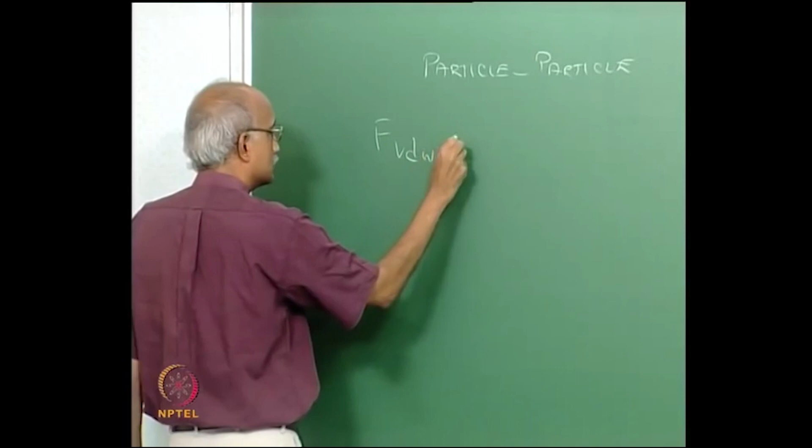The van der Waals forces in the case of a particle to particle interaction can be written again in terms of Hamaker constant A132. If you recall, our definition of 1, 2 and 3 is: 1 will be in this case particle 1, 2 will be particle 2, and 3 is the intervening medium, liquid or gas. So, Hamaker constant multiplied by...

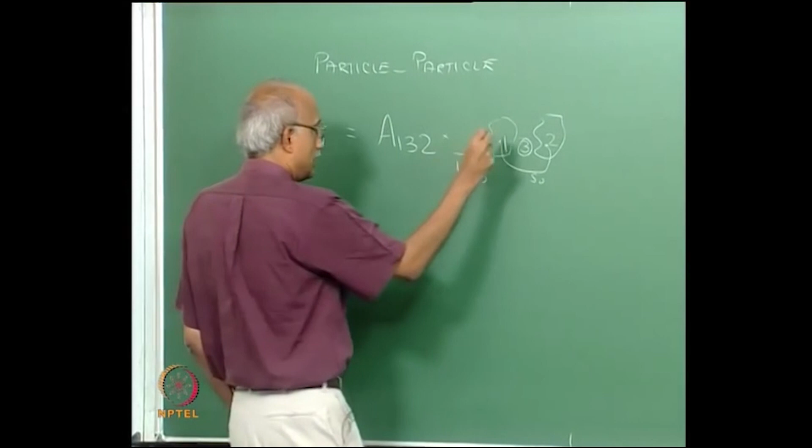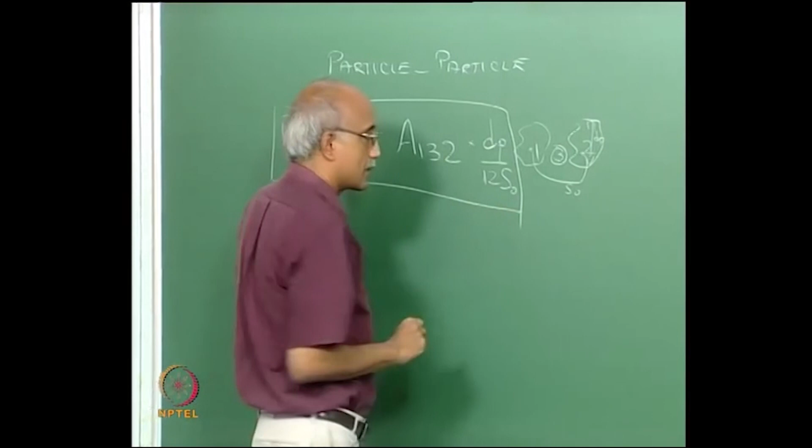The distance of separation between them also enters your equation as 12 times, if the distance is some S0, it is divided by 12 times S0, and the diameter of the particles, essentially representing them as equal sized particles, will again enter in the numerator as a size term. So, just like the van der Waals force of interaction between a particle and a surface, the force of interaction between two adjacent particles also shows a linear dependence on the particle size.

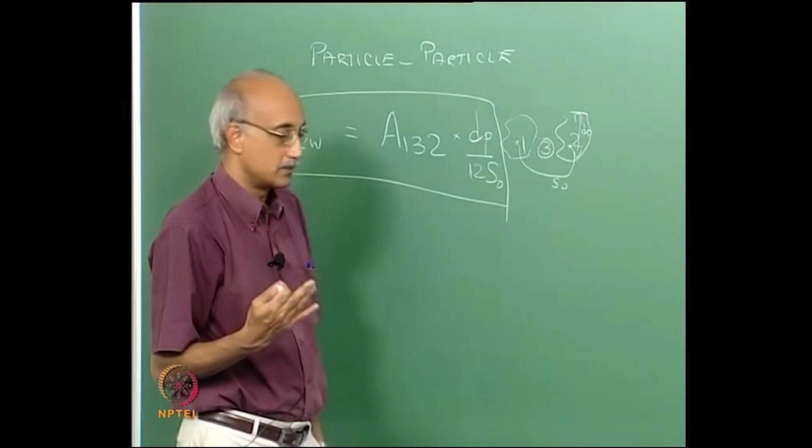Now, this is for the case where the two particles are of equal size, particle size dp. When you have two different diameters dp1 and dp2, then you essentially define an equivalent diameter, a mean diameter. So, if you have two particles of sizes dp1 and dp2, you can define an effective diameter 1 over dp bar, which is equal to 1 over dp1 plus 1 over dp2...

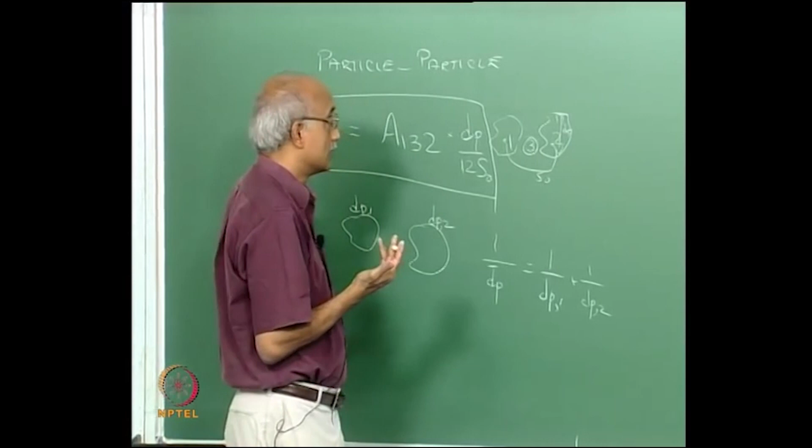...and that will serve as the effective diameter that governs the van der Waals force of interaction between these two particles. So, if you look at the van der Waals force of molecular interaction, the mechanisms and the forces are really not very different from the forces of interaction between a particle and a surface.

Similarly, if you look at electrostatic forces, and let us say that you have two particles of charges q1 and q2, then the electrostatic force of interaction between them will be q1 q2 divided by 4 pi epsilon r epsilon 0 times s squared, where q1 and q2 are the charges on the two particles, epsilon r is the dielectric constant of the medium, epsilon 0 is the permittivity of free space, and s is the distance of separation between the centers of the two particles. So, again electrostatic forces between two particles are very, very similar in their behavior to electrostatic forces between a particle and a surface.

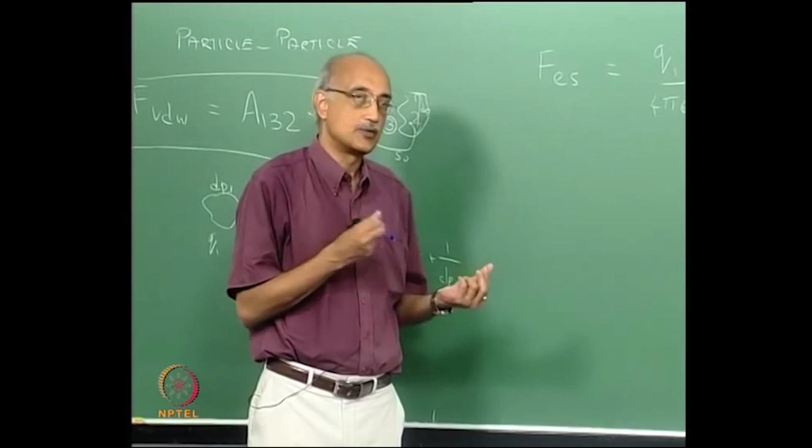So, what is unique about particle to particle interactions? Why do we need to study that differently from particle to surface interactions? The primary reason for this is this cohesive behavior. What do we mean by cohesive behavior? When you have a suspension where you have a fluid and you have various particles that are suspended in the fluid...

...there are various modes of interaction between the adjacent particles. In the simplest case, they do not even know that each other is there. So, the behavior of every particle can be taken to be independent of the behavior of any other particle in the system.

But in reality, there is always a tendency for two particles that are near each other to try and find each other. And when that happens, you first start forming a bridge between two adjacent particles. It is called a liquid bridge. And when that happens, when you have bridging between two particles, this is called the pendular state of cohesion.

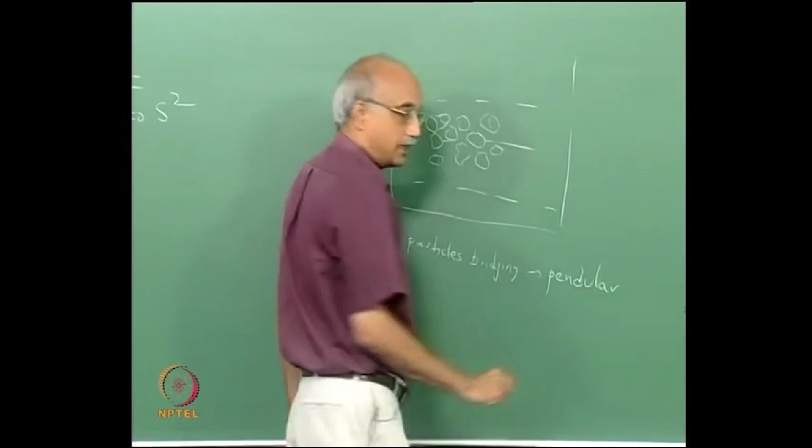What will happen next? A third particle will be brought into this system. When you have three particles that are bridged by the surrounding fluid, that is called the funicular state of cohesion.

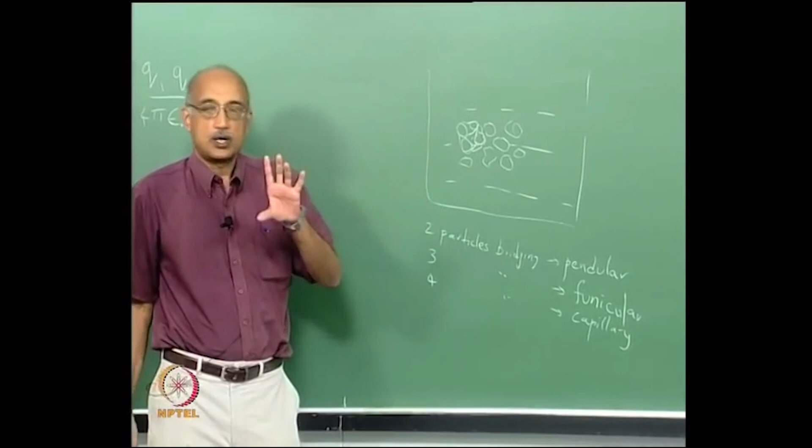And finally, the next state would be one that involves, let us say, 4 particles. When that happens, that is what we call the capillary state of cohesion. Now, when this bridging extends beyond 4 particles and starts encompassing a larger number, more than 4 particles now begin to be bridged by the surrounding fluid, that is called the droplet state of cohesion.

And it turns out that the cohesive behavior between the particles very much depends on what state of cohesion they are in. For example, when you have no cohesion, that is the simplest case, so each particle can be treated as a hard sphere that is moving on its own in the surrounding fluid. When you have two particles that are bridging, pairwise bridging, the pendular state, that is a state of minimum cohesion in the fluid. So there is cohesive behavior, but it is reasonably mild.

As you go into the funicular and capillary phases, the extent of cohesion begins to increase, and therefore, you have to start treating the particle phase virtually as a continuous phase that is present within another continuous phase. In other words, you have to start following the two-phase model in order to characterize the behavior of such suspensions.

And by the time you get to the droplet state, where there is larger than 4 particles that are essentially bonded together, it becomes highly cohesive behavior, and you cannot describe the motion of such a suspension without understanding how this droplet behaves as a separate phase that is contained within the macroscopic fluid phase.

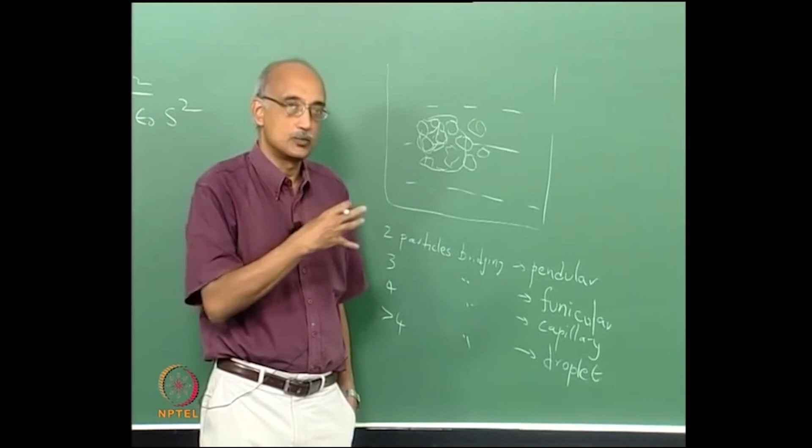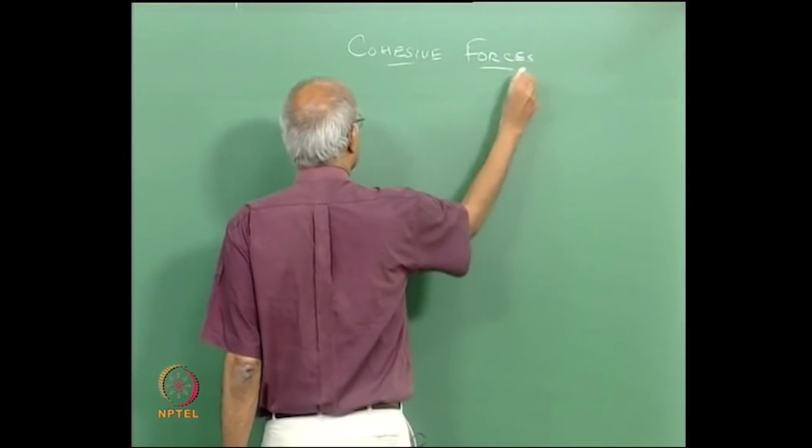So that's what makes cohesion interesting. These are behaviors that you don't normally encounter in the case of particle to surface interactions. Now, in terms of forces of interaction, cohesive forces - we already talked about van der Waals forces and electrostatic forces. In addition, you have what are known as capillary forces.

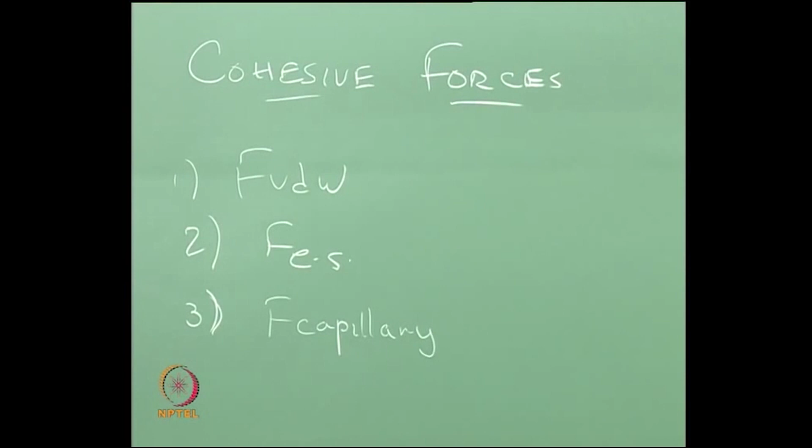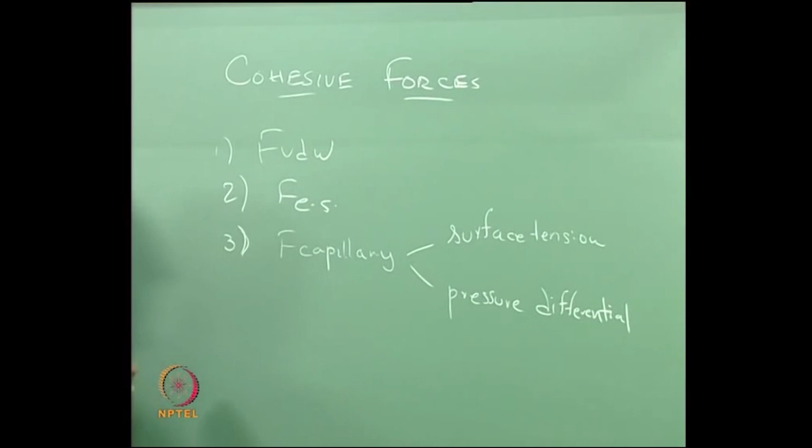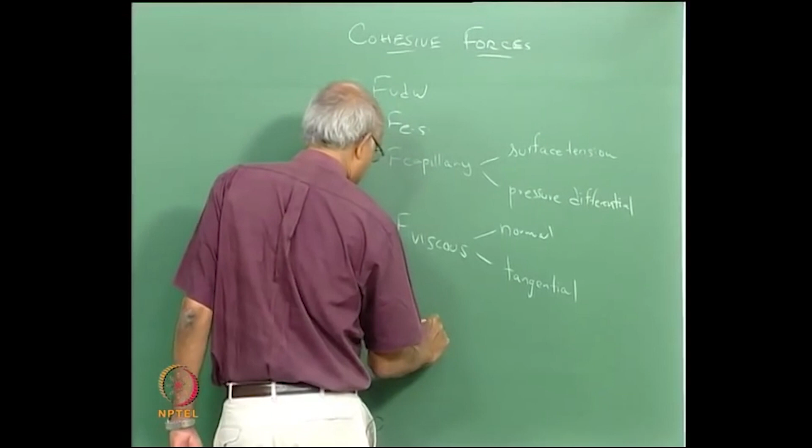Now, the capillary force itself has two components to it. One is surface tension related, and the other is pressure differential related. In addition to that, you have viscous forces, and here again you can subclassify them as normal and tangential. And finally, you have spring like forces, and this also you can classify as normal and tangential.

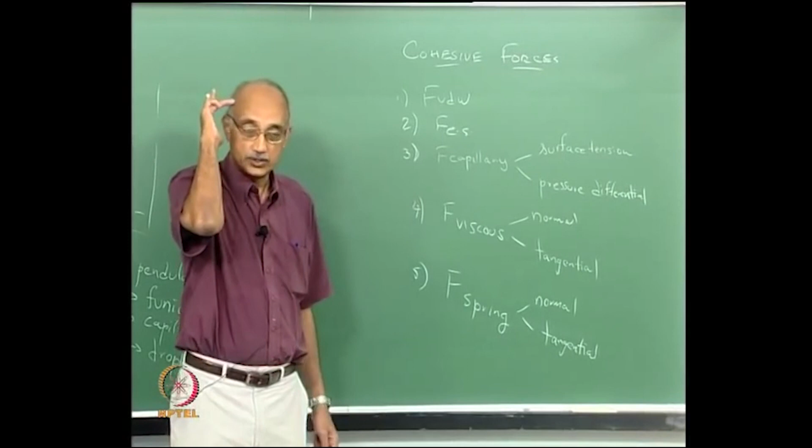So we will look at what these are in more detail, but the point is that in order to describe cohesive bonding between two particles that are in solution, you have to characterize all of these forces, and the net force that is acting will be a sum of all these forces that are acting on particles that are suspended in a solution. So let us look at forces 3, 4 and 5 in a little more detail.

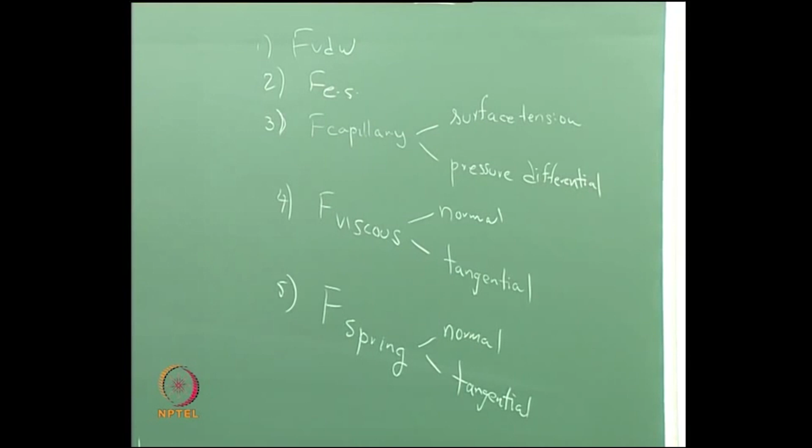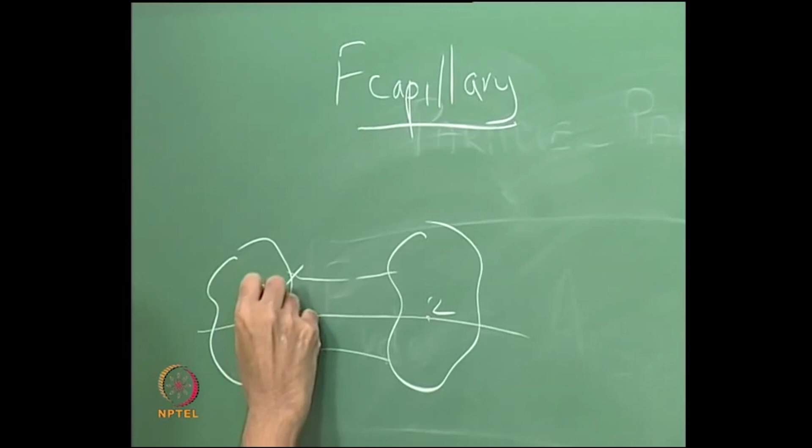So, what do we mean by capillary forces? Let us take the situation where you have particle 1 and particle 2, and there is a liquid or fluid bridge between them. Now, the angle to the centroid of the particles that the meniscus makes, this angle is called beta. Are we still on? Okay.

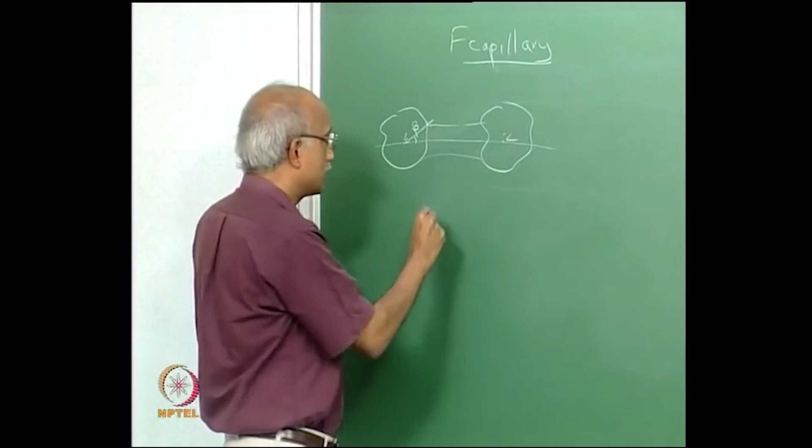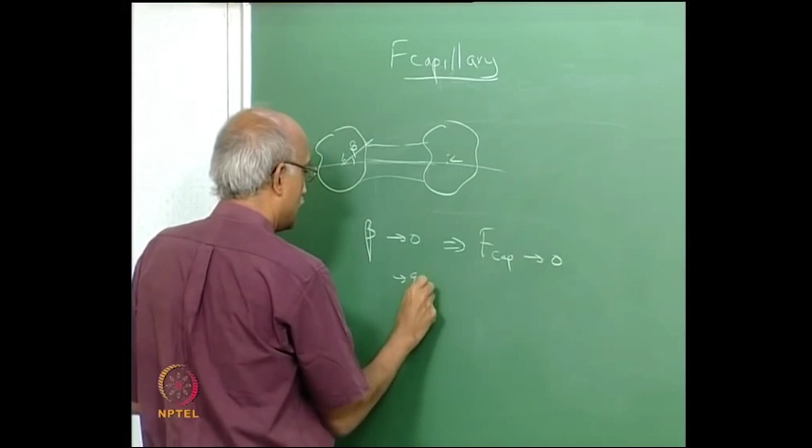And as the angle beta becomes smaller and smaller, as beta tends to 0, the force - essentially this meniscus will become thinner and thinner. So, as you can imagine, there will be less and less cohesive bonding between the particles. So, as beta tends to 0, F capillary will tend to 0, and as beta tends to 90 degrees, F capillary will tend to its maximum value.

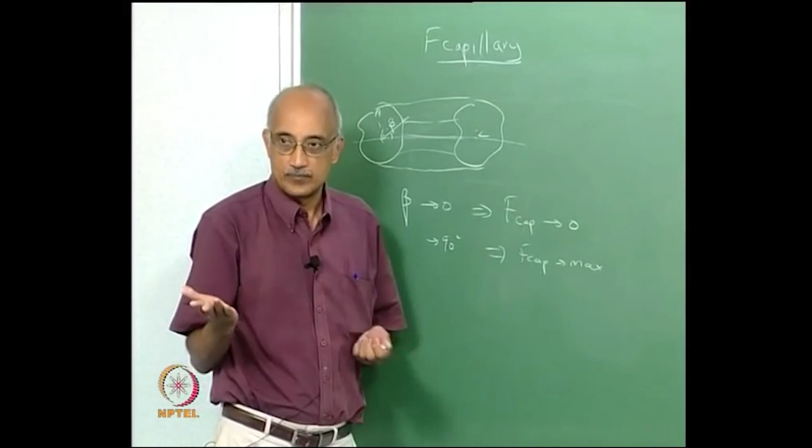So the 90 degree corresponds to the case where essentially the liquid bridging extends all the way to the outer perimeter of the particles. So beta is now 90 degrees. So this represents the case where we have complete wetting - this is a case where you are into the so called capillary or droplet regime of cohesion. So whether you are in the pendular or funicular or capillary or droplet state depends a lot on this parameter beta, which is also called the half filling angle or the angle of cohesion between adjacent particles.

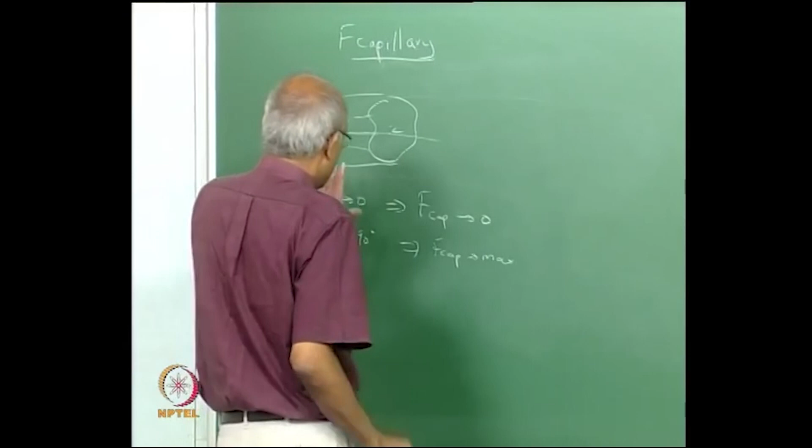So when we look at the forces now between these two particles, there are really two components to it. One is just due to the surface tension that is associated with the fluid that is bridging the particles, and the other is associated with the pressure differential delta P across the fluid to air interface that surrounds this suspension.

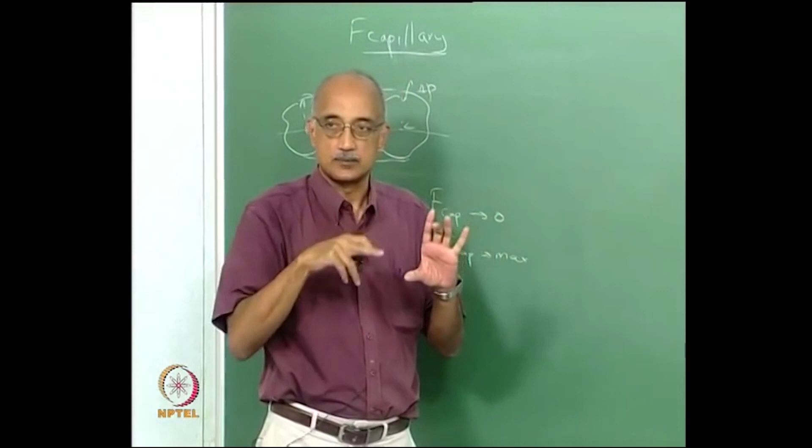So you have to split the capillary force into its two components, F surface tension plus F pressure differential, and you write those as 2 pi rp gamma times sine squared beta plus pi rp squared delta p sine squared beta, where 2 pi rp gamma sine squared beta represents the surface tension force and pi rp squared delta p represents the circumferential force, which is the pressure differential multiplied by the circumferential area of the particle. Or you can simplify this and write it as 2 pi rp gamma sine squared beta times 1 plus rp delta p over 2 gamma.

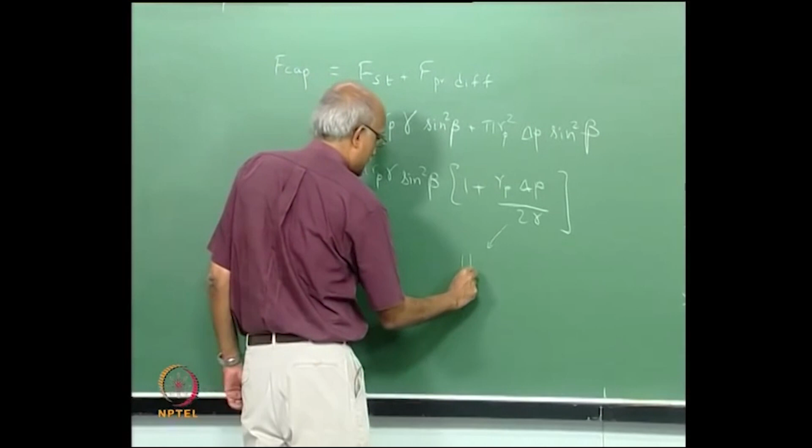This parameter, rp delta p over 2 gamma, is represented as h star, and it stands for what is known as the dimensionless mean curvature, which is a parameter that can be extracted from the basic Laplacian equation governing the elastic behavior of these particles in suspension. The expression for the capillary force can be written as 2 pi rp gamma sine squared beta times 1 plus h star, and it can be evaluated for essentially any pairwise combination of particles suspended in a fluid.

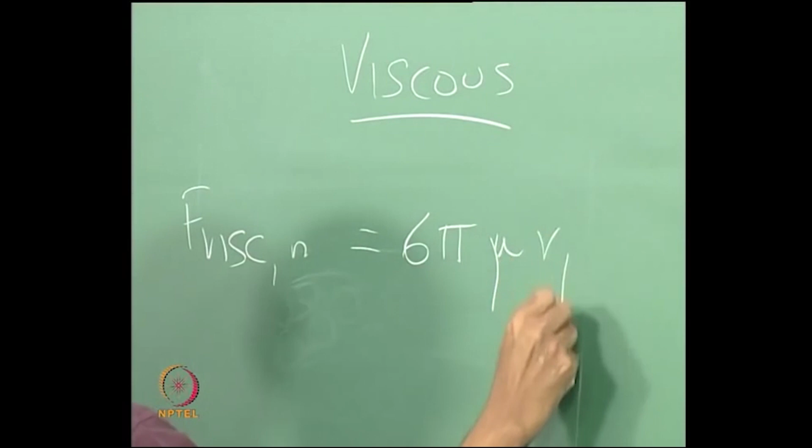Now the viscous forces again can be split into a normal force and a tangential force. The F viscous normal, the normal contribution, is given by 6 pi mu rp times v normal times rp over s, where rp is the radius of the particle, s is the distance of separation between particles, and Vn is the relative normal velocity between two particles in suspension. If you have two particles, that velocity can be deconvoluted into a tangential velocity and a normal velocity, and the delta between the normal velocities of the two particles enters this equation as Vn, while the delta between the tangential velocities enters the equation for the tangential viscous force, given by 6 pi mu rp times Vt times 1 plus 0.5 logarithm of rp over s.

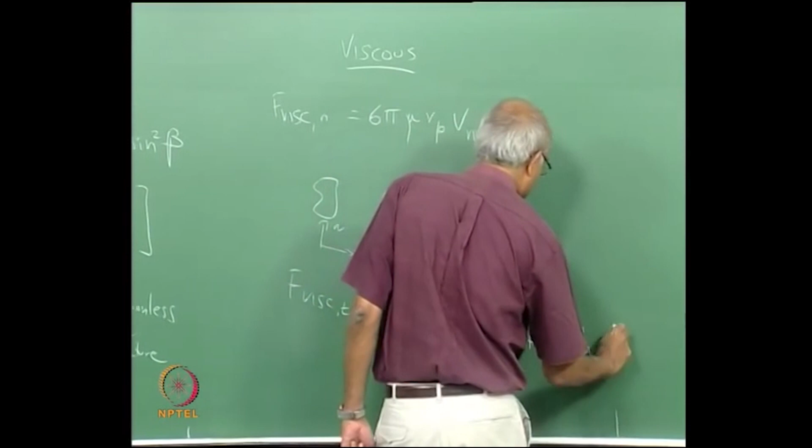So in all of these equations, one thing you'll notice is that most of the adhesive forces still have a linear dependence on diameter, just like we described earlier with particle to surface adhesion forces, where the adhesion force essentially scaled as the size of the particle. Looking at the cohesive forces, the surface tension force clearly has an rp dependence, but the pressure differential, because it's an area effect, has an rp squared dependence. So the net of these two terms gives a dependence of capillary force on particle size somewhere between 1 and 2, depending on whether surface tension or pressure differential forces dominate.

In the case where the h star term is very small compared to 1, you get a linear dependence of the capillary force on rp. Where h star is much larger than 1, you get an rp squared dependence, and for any intermediate value of h star, you get a dependence somewhere between 1 and 2.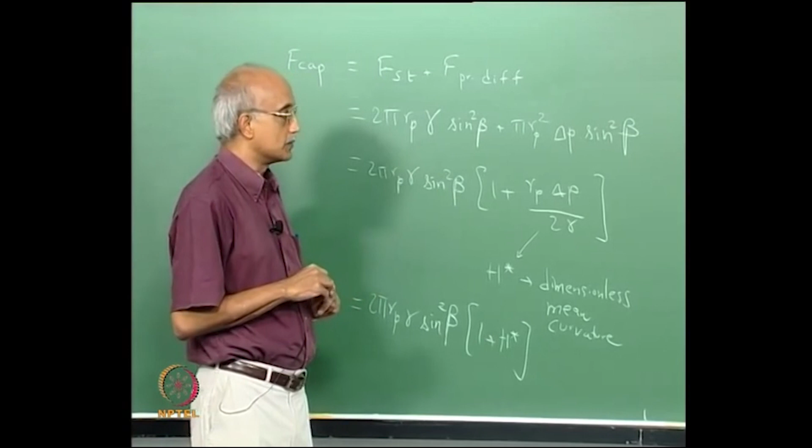Looking at the viscous forces, there is clearly an rp squared dependence of the viscous force between two particles. What that means is, as particles get smaller, the viscous forces will drop off much faster compared to the capillary forces—that is, the normal viscous force.

However, the tangential viscous force, which relates to how particles move relative to each other in the direction of flow—when we say normal and tangential, if your flow direction is like this, the normal force applies normal to the flow direction, and the tangential force applies tangential to the flow direction.

So the normal viscous force goes as the square of particle size, whereas the tangential viscous force essentially goes as rp times logarithm of rp. If you look at the total viscous force and its particle size dependence, you'll reach a value somewhere between 1 and 2, again depending on whether the tangential term or the normal term is dominant.

Just as we reported empirical data on surface to particle adhesion suggesting a linear dependence on particle size as well as relative humidity, there is quite a bit of work done looking at agglomeration of particles in suspension from a purely empirical, experimental viewpoint. You take a bunch of particles, put them in suspension, and monitor their number over time. As the total number decreases over time, there is obviously more cohesion and agglomeration going on. So the rate of reduction in total number of particles over time is a measure of the extent of cohesion present in the system. Another way to track it, of course, would be to look at size.

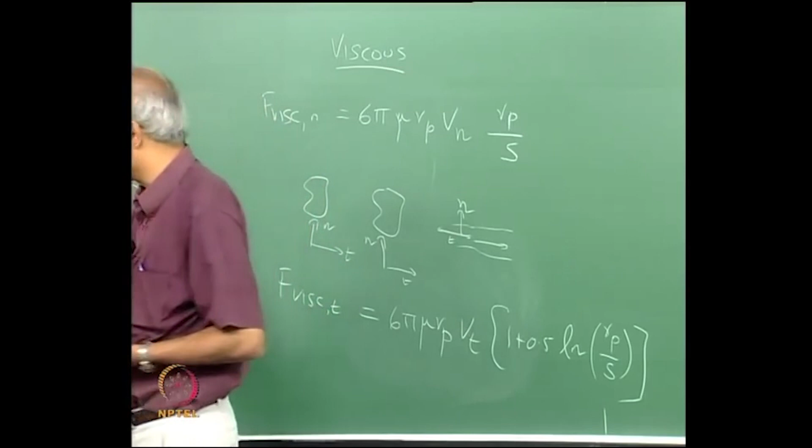If you track the mean size, that size will keep increasing as a function of time if there is cohesion. There are two ways to detect the presence or absence of cohesion in a suspension, and both depend on plotting quantities as a function of time. In one case you can plot n of t, the number of particles of any size at time t. If there is no agglomeration happening, what dependence would you expect? It will be constant as a function of time.

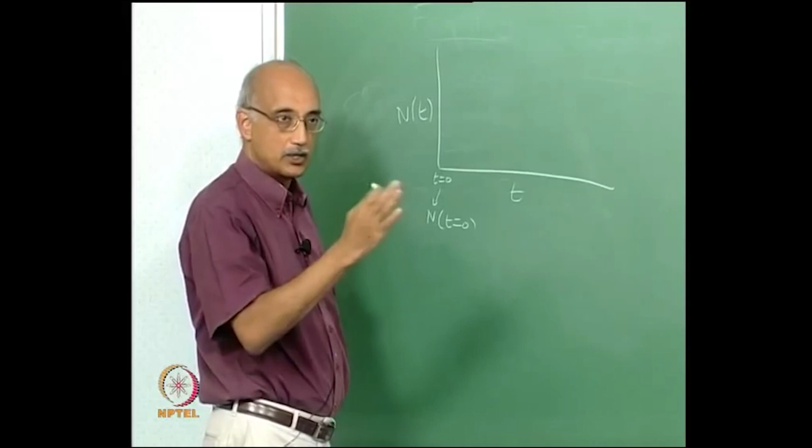So if this is your n at t equal to 0, in the absence of cohesion, this number will remain constant over time. However, as cohesion starts to happen and particles start to agglomerate, you will see a net reduction in the number of particles as a function of time.

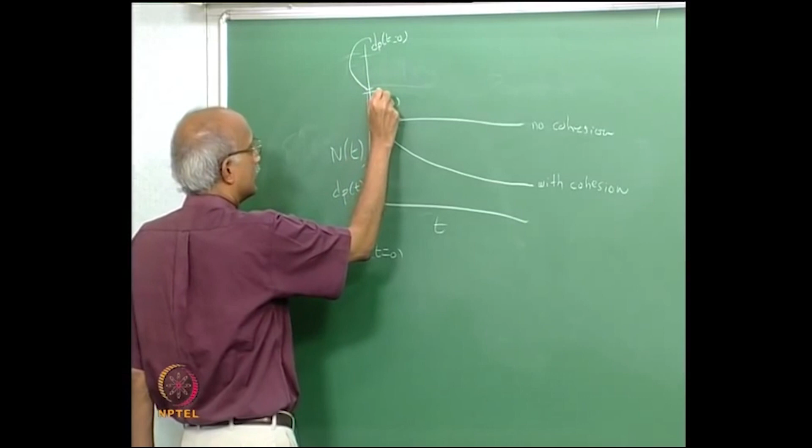Similarly, you can also plot particle size dp as a function of time. Let us say this is your particle diameter at time equal to 0. If there is no cohesion, it will remain constant over time, whereas if there is cohesion, that particle size will keep increasing in some fashion. So with cohesion you will see an increase in the mean particle size of the system.

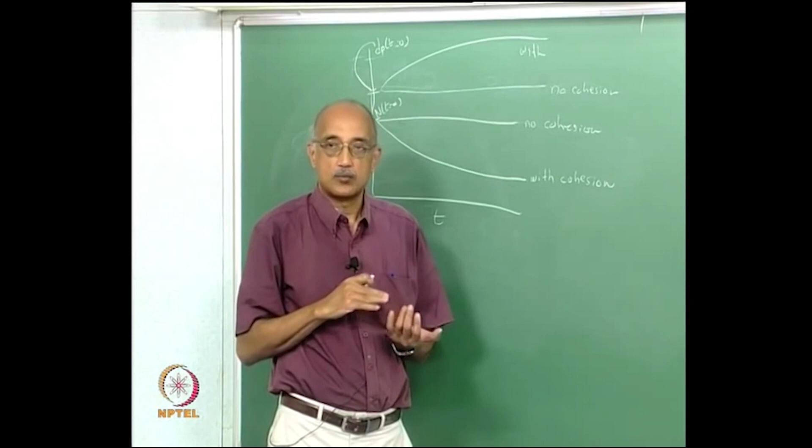So this behavior, where there is a monotonic increase of particle size with time, or a monotonic decrease in the number of particles with time, is clearly indicative of cohesive phenomena happening in your suspension.

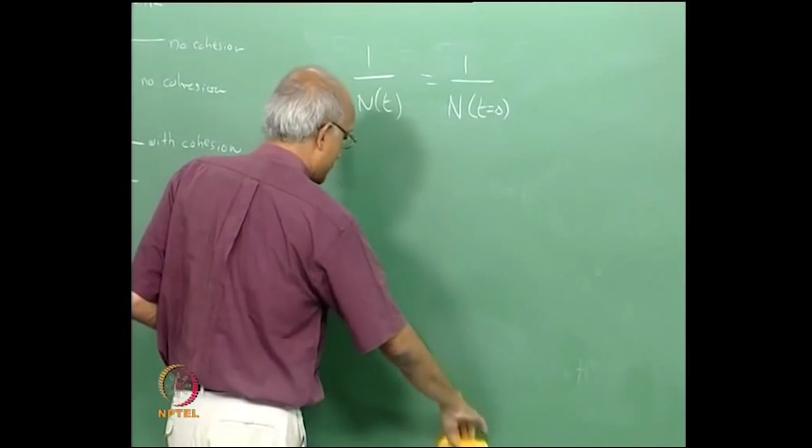In fact, there is an empirical equation that governs the relationship between particle counts at various times. If you take 1 over n of t, this is equal to 1 over n at t equal to 0, plus 4kT Cc t over 3 times mu, where n of t is the number of particles at time t, n at t equal to 0 is the number of particles at time equal to 0, k is the Boltzmann's constant, T is the temperature, lowercase t is time, mu is viscosity, and Cc is the Stokes-Cunningham slip correction factor.

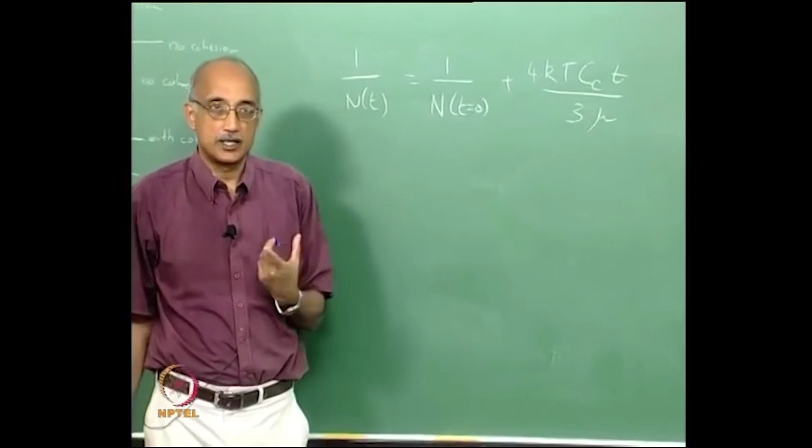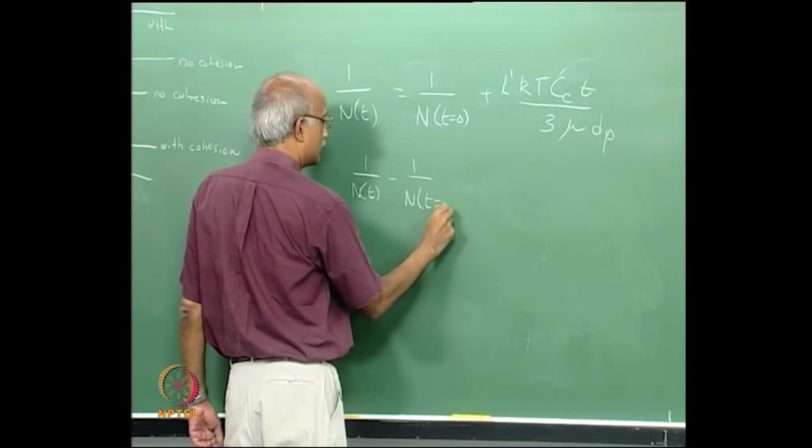If you recall, I mentioned that this is roughly proportional to 1 over dp. So effectively you can rewrite this with some constant k prime and have the particle diameter in the denominator. So what is the implication of this equation? What does this tell us about agglomeration kinetics? What parameters does it depend on? If you take 1 over n of t minus 1 over n at t equal to 0, this is now equal to k prime kT t over 3 dp times mu.

So if you examine this equation, which, by the way, is empirical - that means people have done thousands of experiments, recorded the data, and done a regression analysis to determine how particle counts change as a function of time, and come up with this expression for various systems.

What this tells us is that as temperature increases, there is increasing agglomeration. As time increases, there is increasing agglomeration. As particle size decreases, there is increasing agglomeration, which is why nanoparticle systems in particular are very susceptible to cohesive behavior - there is an excessive tendency for nanoparticles to agglomerate in solution and form clusters. And finally, as viscosity decreases, there is an increasing tendency to agglomerate.

So if you want to keep particles suspended and dispersed in solution, this gives you a lot of clues about how to keep particles separated in suspension. Use high viscosity liquids. Is water a high viscosity liquid? Compared to some, but it's not the highest viscosity liquid you can find. You can add additives to increase its viscosity. Particle size, probably you cannot play with too much - you need nanoparticles, right?

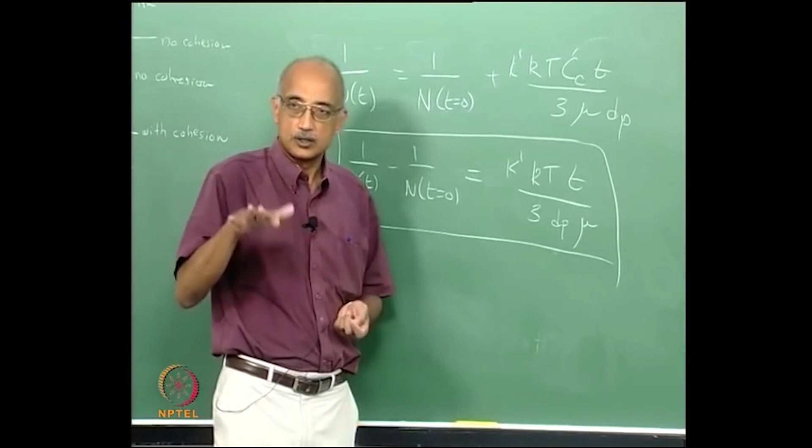However, temperature - now that's interesting. Essentially, by lowering the temperature, you can keep the particles more uniformly dispersed. So if you are trying to maintain a nanoparticle suspension and keep the particles dispersed, what do you do? You freeze it - that's the simplest thing to think of, because when you freeze it, the particles are held where they are. Then just before you are ready to use the nanoparticles, remelt the suspension. Alternatively, even if you don't freeze it, lower the temperature close to the freezing point, which will reduce the mobility of the particles and prevent agglomeration from taking place.

Time - obviously the longer you let the suspension sit, the greater the tendency for cohesive behavior to happen.

If you want to use a nanoparticle suspension, you use it as soon as you make it, or alternatively you make the suspension just when you are ready to use it. It's like a just-in-time process. If you let any nanoparticle suspension sit for any length of time, you are going to see severe cohesive behavior.

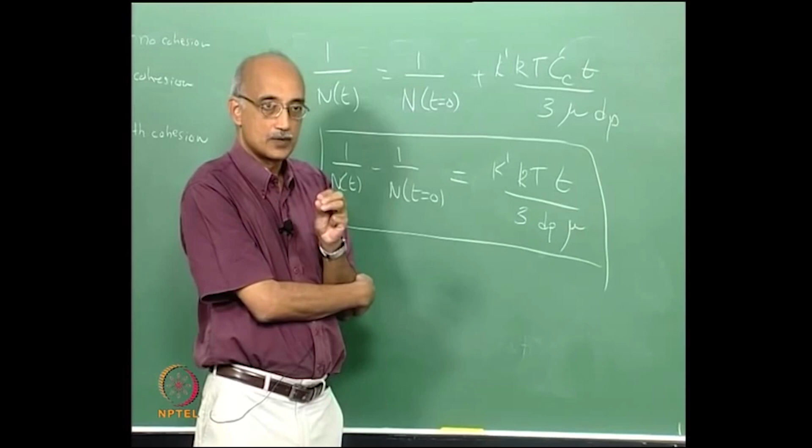You will see particles disappear and particle sizes increase because of cohesion, agglomeration, and so on. When you look at extent of agglomeration, particle size sits in the denominator. Now what that tells us is that the force of agglomeration between particles is actually scaling inversely with particle size. So this would tell you that F cohesion in general goes as 1 over dP. But if you look at the equations we have formulated, we are not really getting that trend anywhere. They are all either linearly dependent to particle size or linearly dependent on some power or exponent of particle size.

So how do you reconcile that with this behavior that we know intuitively, that finer particles will find each other and adhere much faster compared to larger particles? Just like the apparent conflict we discussed earlier in terms of particle adhesion and particle removal, this is something else to ponder. Is there a theoretical reason for this? Can we explain this, or is it completely anomalous behavior? We'll come back to this later.

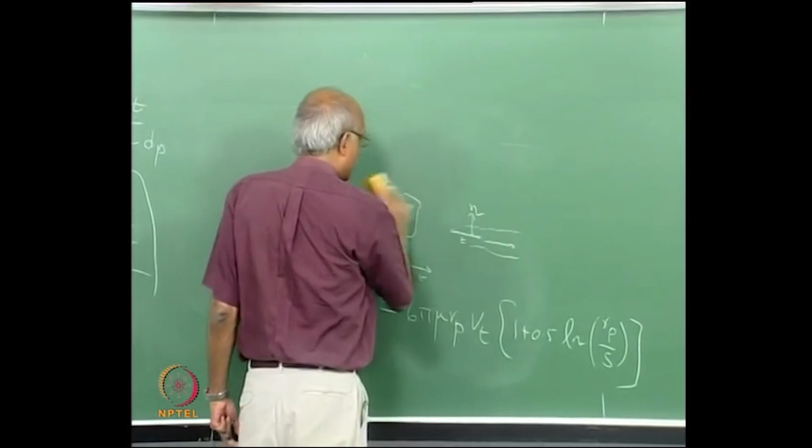We have talked about van der Waals forces, electrostatic forces, capillary forces, and viscous forces. What do we mean by the spring forces?

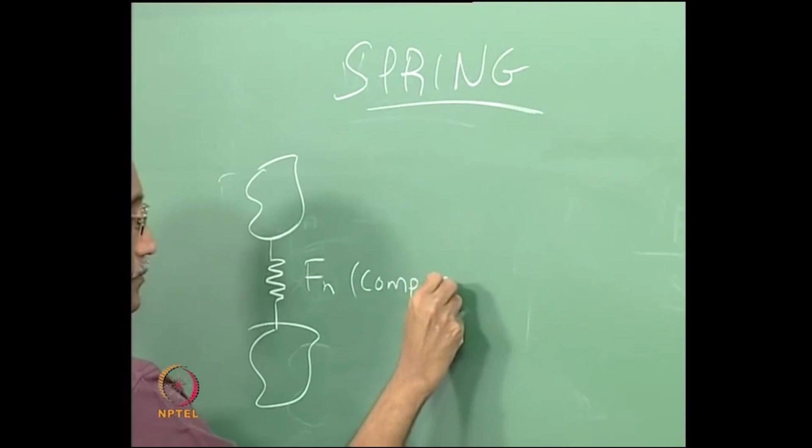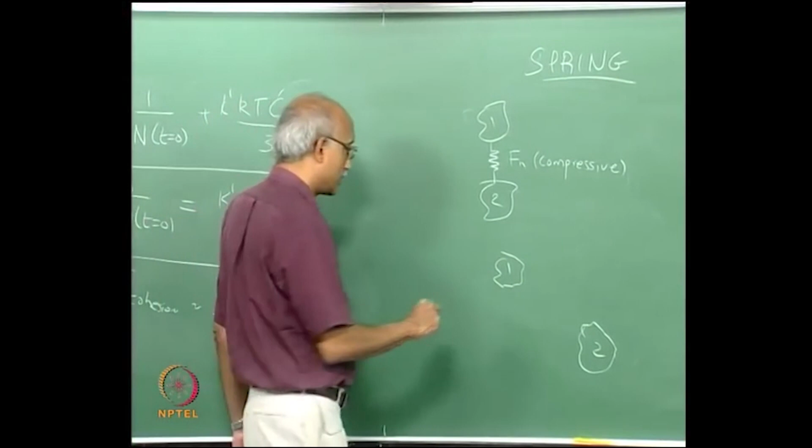When you have two particles that are in suspension, they behave as if they are attached to a spring. In the normal direction there is a compressive force associated with this pair of particles. Over time, as particles start moving away—let's say particle 1 stays where it is, but particle 2 has now moved—then there is also a tangential spring force that applies, Ft, which has a tendency to bring them back together. Both the Fn force and the Ft force are essentially attractive forces.

The particles are constantly trying to, as you try to move them apart, stick together, and so they both lead to cohesive behavior. The higher the normal force and higher the tangential force, the greater will be the extent of cohesion.

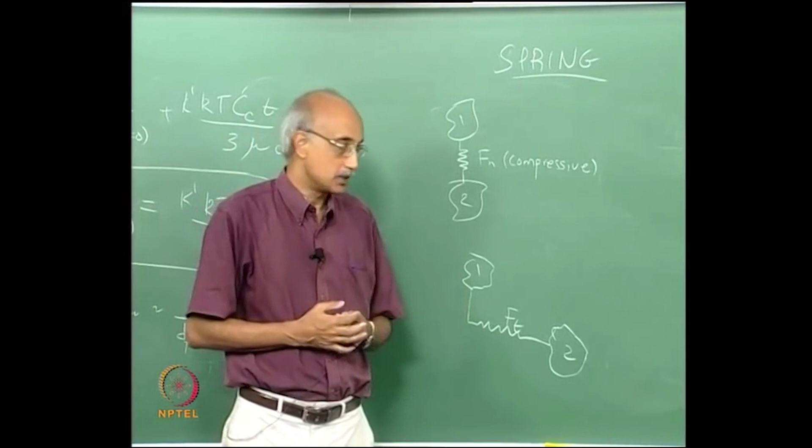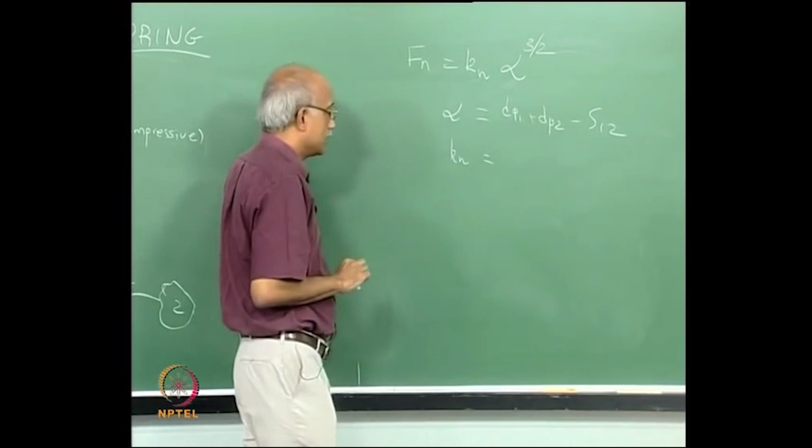This compressive force Fn can be written as Kn times alpha to the power 3 by 2, where alpha is dP1 plus dP2 minus S12, where dP1 and dP2 are the diameters of the particles and S12 is the distance of separation between the centers of the particles. The parameter Kn is given by 4 by 3 times dP star times square root of E star, where E is the Young's modulus.

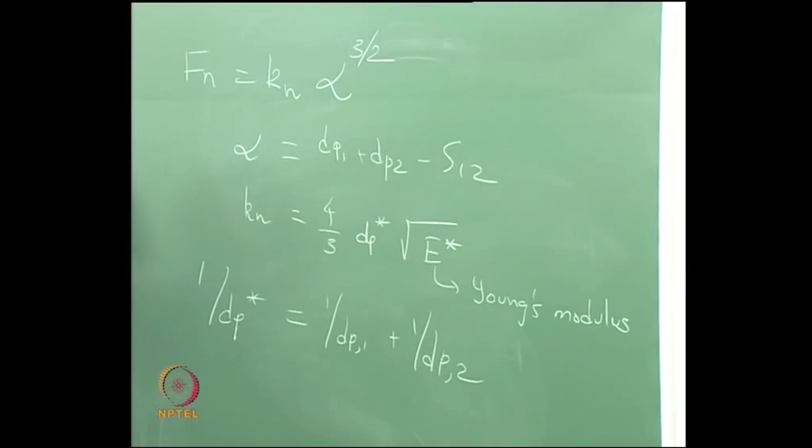dP star is calculated by taking 1 over dP star equals 1 over dP1 plus 1 over dP2, and E star is calculated as 1 over E star equals 1 minus nu1 squared over E1 plus 1 minus nu2 squared over E2, where the nu values are Poisson's ratios.

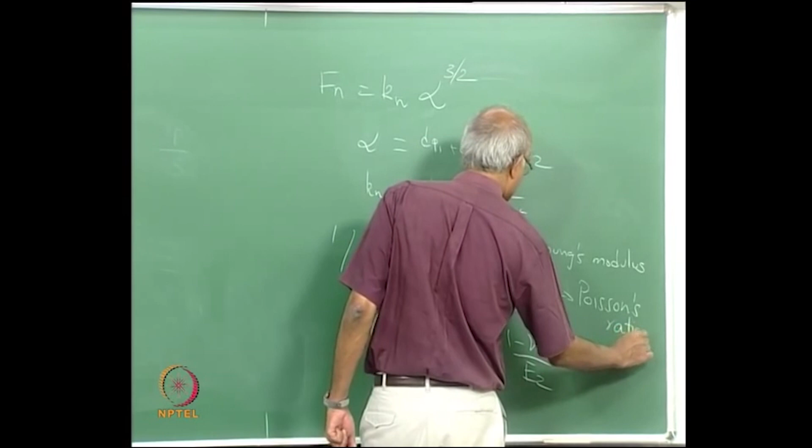So if you look at the expression for the normal force, the key dependencies are on the sizes of the particles, the distance of separation between the particles, and on the associated parameters that govern the elastic behavior of the system, particularly the Poisson's ratio and the Young's modulus for the two particles.

If you look at the tangential component, Ft is related to Ft0, which is the time-zero value of the tangential force, basically where the two particles are virtually below each other. So there is no tangential displacement, and as soon as the displacement starts to happen, this kicks in. It is actually minus kT times delta S, where delta S is the tangential distance of separation between the two particles.

Delta S is related to time delta t by the equation delta t times Vt. So if you take a time differential delta t and multiply it by the tangential velocity—again the relative tangential velocity—that gives you the distance of separation at time equals t. So this is a relative value.

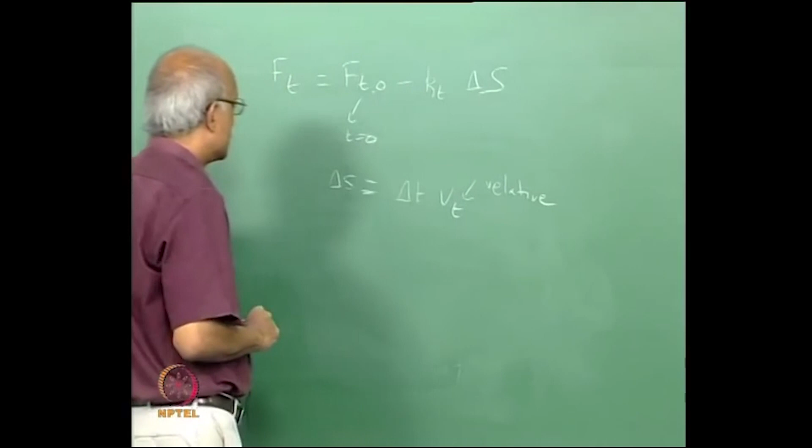Basically, when you have two particles that are adjacent to each other, they also have a tendency to have a compressive interaction between them as well as a shearing interaction. So this tangential interaction can also be written as a shearing force, but in this case, when particles are suspended in solution, the shearing force tries to bring them back together, just as the normal force is a compressive force that tries to force the particles together.

So, going back to that list we had, what you can see is virtually all of the cohesive forces are attractive in nature. Van der Waals forces are attractive, surface tension forces, pressure forces, viscous forces, as well as the spring forces are all attractive in nature. The only force that is potentially repulsive is electrostatic forces. So this again gives you a lot of clues about how to keep particles separated when they are suspended.

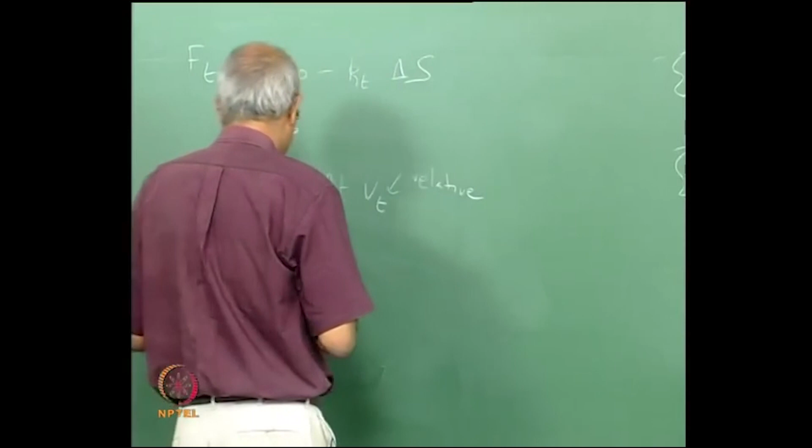Since virtually all the forces of interaction are attractive in nature, the first thing you have to understand is there is an overwhelming tendency for particles to attract each other. So, if you want them to repel each other, one way is to charge them. If you impart a slight charge on all the particles, the electrostatic force can be made repulsive in nature.

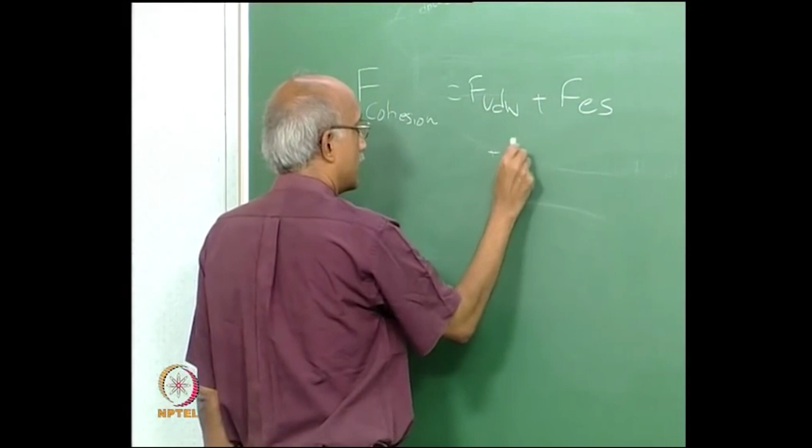So let us sum up all the forces that act in cohesion: van der Waals, plus electrostatic, plus capillary, plus viscous, plus compressive, plus shearing.

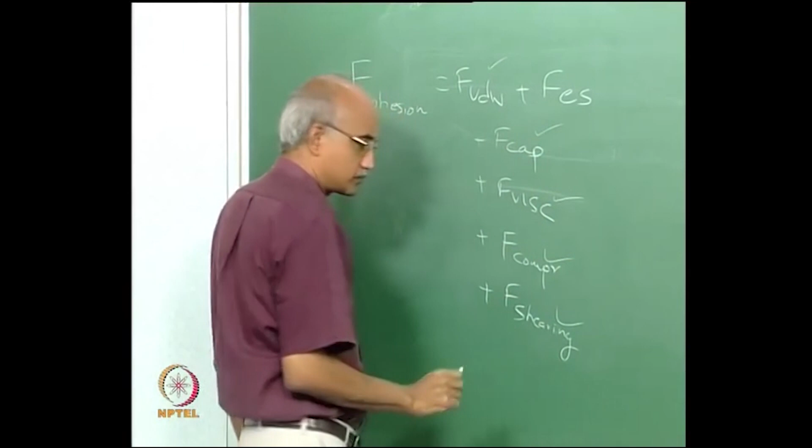Of these, van der Waals, capillary, viscous, compressive, and shearing are all attractive in nature. However, the electrostatic force can be attractive or repulsive. By inducing a large charge on adjacent particles, ensuring they are of the same sign, you can set up a repulsive force which can balance or even overwhelm all the other contributions. So if I am trying to minimize cohesive behavior, one technique is using electrostatic effects to provide a repulsive force in the system.

What else can I do? Well, we know these forces are attractive, but you can make them weaker. For example, van der Waals forces can be reduced by simply immersing particles in a liquid medium. So if you are trying to keep particles segregated, do not keep them as a dry powder. A dry powder has a much more severe tendency to agglomerate than a wet slurry. So suspend the powder in a liquid to minimize van der Waals attraction.

Later on, when you get ready to use the powder in dry form, you can always evaporate the liquid in which they are suspended. Of course, to do that you are better off using a high volatility liquid which can be easily evaporated. Water is not an easy liquid to evaporate, but there are many organic solvents you can suspend particles in which have high volatility, so you can easily recover the particles in the dry state whenever you need them.

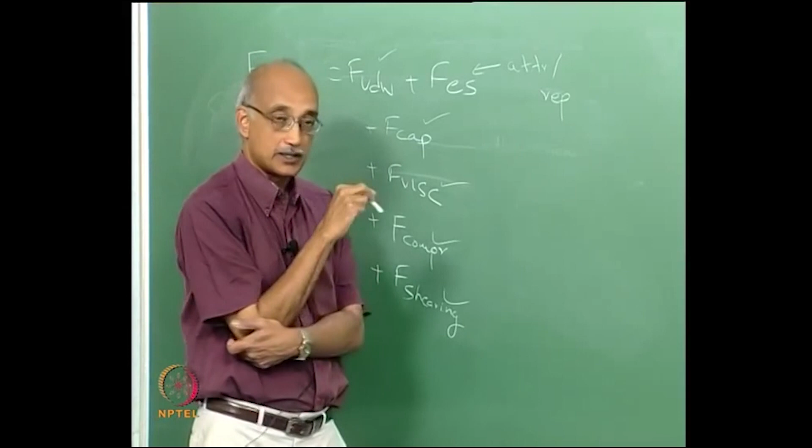In terms of capillary forces, surface tension is an important component. How do you minimize surface tension? By using surfactants, and that is why surfactants are widely used to minimize cohesion in suspensions. There are two ways surfactants help: one is by reducing surface tension forces, and the other is by reducing hydrophobic-hydrophilic interaction forces.

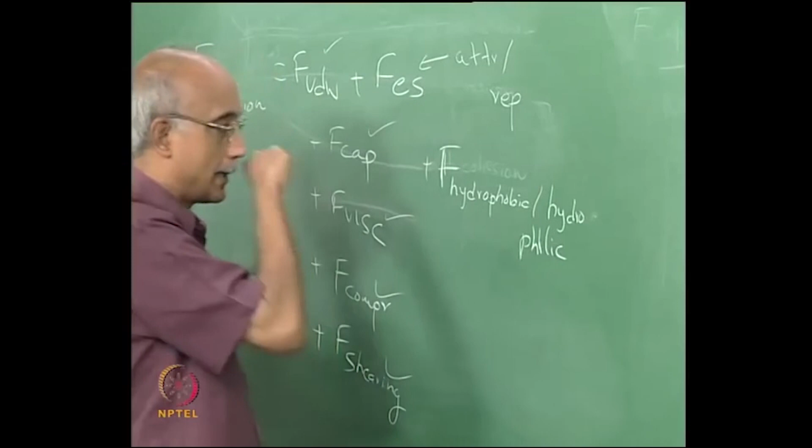By the way, we haven't talked about this here, but refer back to our discussion of interaction between particles and surfaces. The force of hydrophobic/hydrophilic interactions is another major contributor, and this force can also be made attractive or repulsive when you have particles in suspension.

So one way to reduce cohesive behavior of particles suspended in a liquid: if you have two particles suspended in liquid with a high cohesive force between them, the use of surfactant helps in two ways. One is by reducing surface tension forces. The other is if you can get that surfactant to actually coat on top of these particles. For example, a simple non-ionic surfactant can be made to form a coating layer on the surfaces.

Then, as we saw earlier in our discussion on surface interactions, the hydrophobic portion will attach itself to the particle, and the hydrophilic portion will stick out. Similarly on the other particle, the hydrophobic portion attaches and the hydrophilic portion sticks out, and these two will repel each other because they both have a tendency to attach themselves to water. Therefore, surfactants help in two ways: by reducing surface tension, and by providing an active coating on top of the particles, which can provide a repulsive interaction based on the hydrophobicity/hydrophilicity of the surfactant layer compared to the medium of suspension.

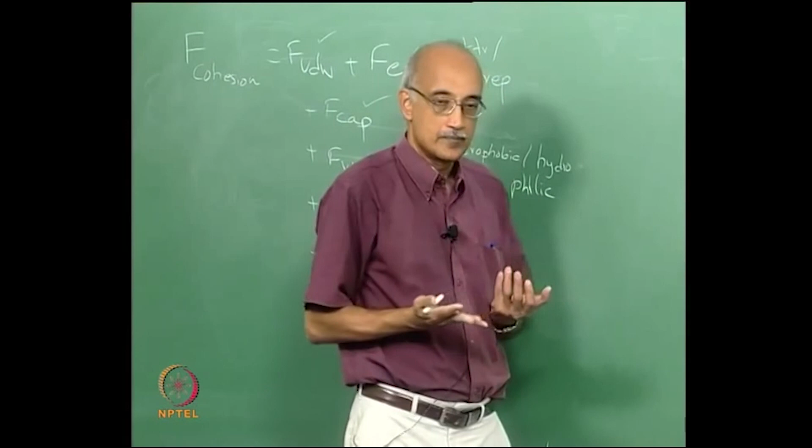So you have to choose a surfactant appropriately for the liquid in which the particles are suspended. For example, if the suspension medium is water, then a simple non-ionic surfactant will work in this fashion. But if the particles are suspended in a hydrocarbon solvent, then the same technique will not work.

In this case, the coating material should preferably be some low surface energy material, like for example a fluorocarbon, because it has low surface energy and will reduce the force of interaction between adjacent particles.

So the way that you can reduce particle to particle cohesive forces, using surfactants or detergents or solvents, is in two ways. One is to affect the hydrophobicity and hydrophilicity and set up a repulsion mechanism. The other way is to keep the attractive force, but reduce its magnitude by reducing the surface energy of the particle by providing a suitable coating material.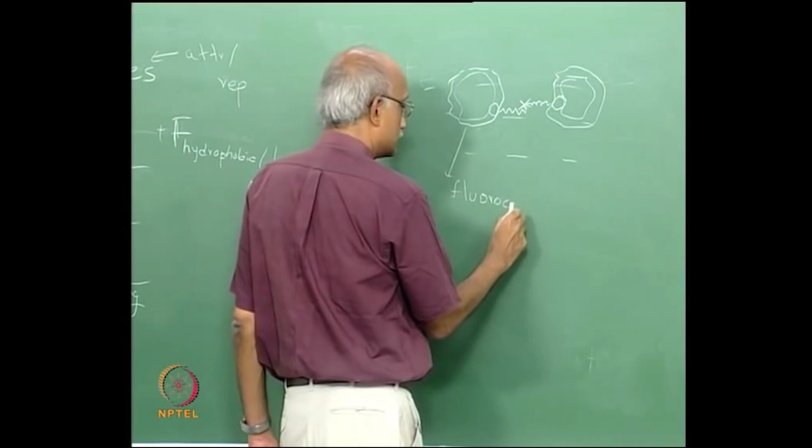So if you have a surface that is coated with a fluorocarbon, by definition it has very low surface energy, which implies very low force of attraction.

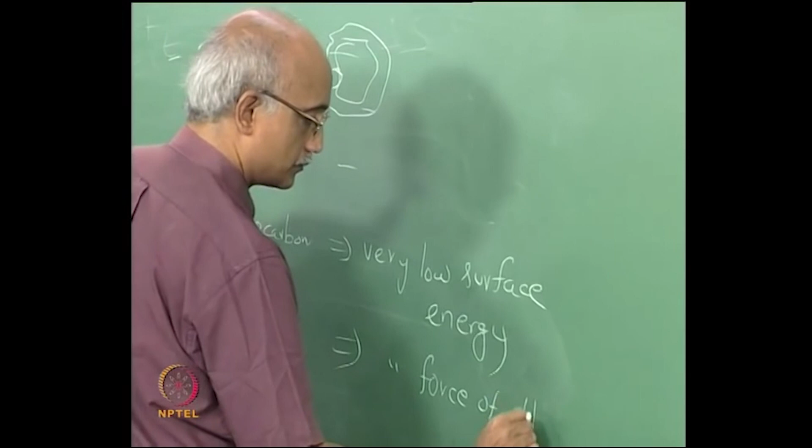As we have discussed earlier, the surface energy of a material relates to its Hamaker constant, which relates to its van der Waals force of adhesion. So a fluorocarbon works by producing a low surface energy surface.

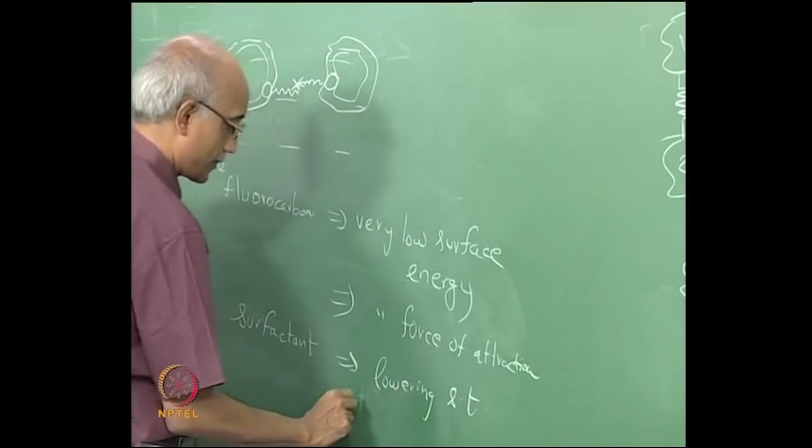A surfactant, on the other hand, works by lowering surface tension and by providing hydrophobic/philic repulsion.

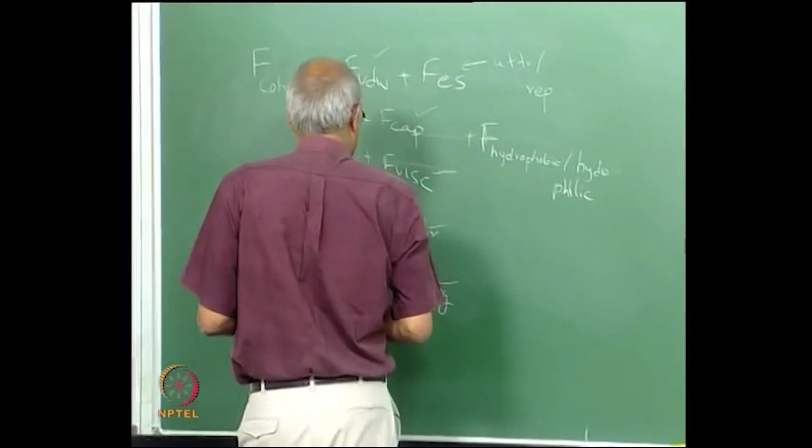Okay, let us come back to this equation. What else can we affect to minimize cohesive forces? We have talked about what we can do to minimize the van der Waals force, what we can do with the electrostatic force, and we have talked about the capillary force.

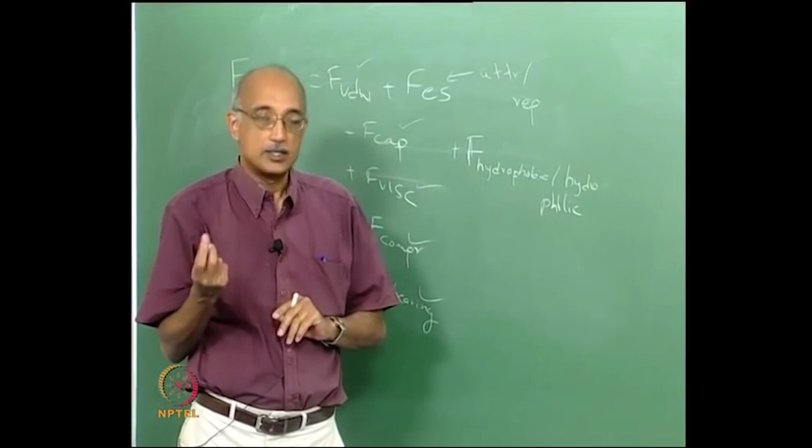By the way, in terms of reducing capillary interaction, another way to reduce the tendency to agglomerate is to reduce the initial concentration of particles. The lower the concentration of particles, the N0 value, the lower will be the cohesive phenomena that takes place afterwards.

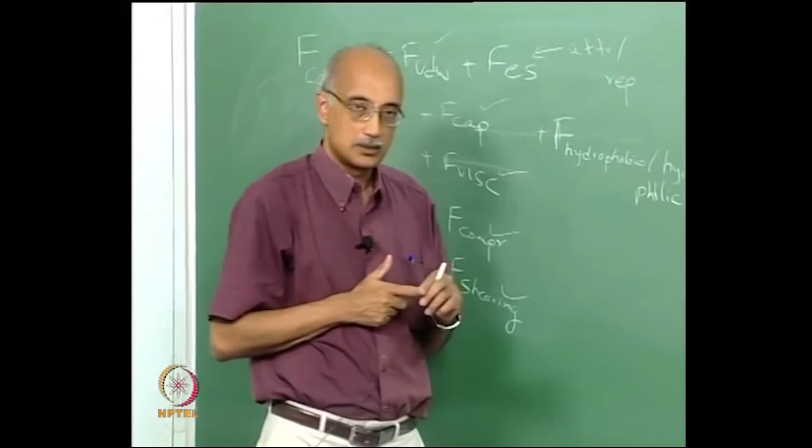So in a highly dilute slurry or suspension, the tendency for cohesion and agglomeration will be significantly lower for many reasons. The simplest being the interparticle distance is much greater in a dilute suspension compared to a concentrated one, so it's more difficult for particles to find each other and agglomerate. So that gives us another option: if you want to maximize cohesion, increase the concentration in the slurry; if you want to minimize cohesion, you minimize the concentration of particles.

We talked about hydrophobic, hydrophilic forces. As for viscous force, basically if you can reduce the viscosity, that can actually result in reduced cohesion.

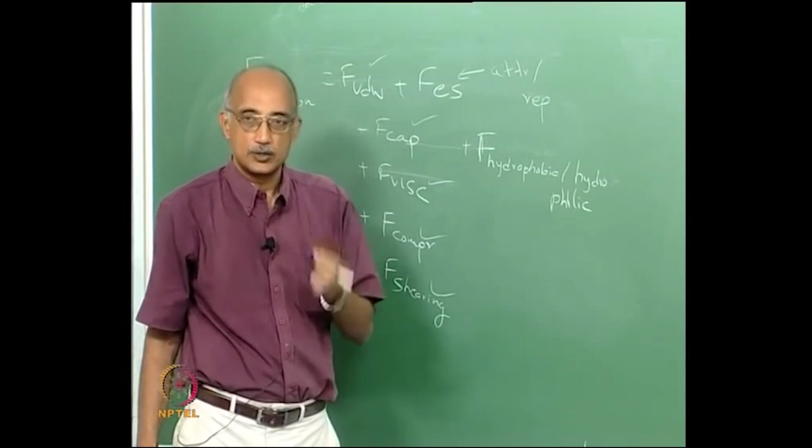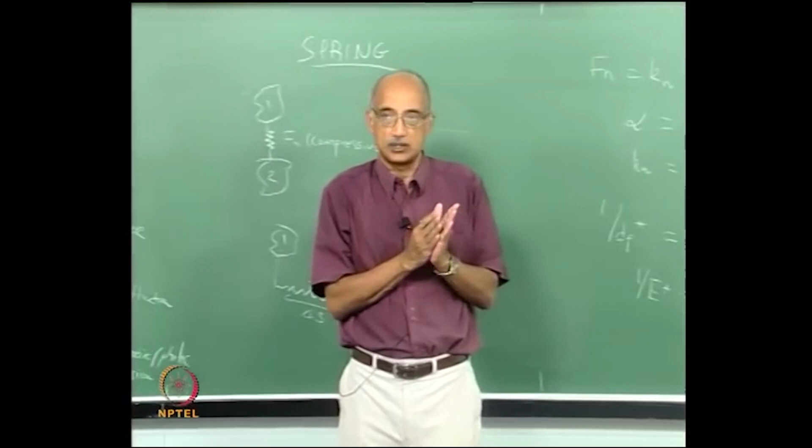Compressive force and shearing force - here essentially what you can do is, when you try to keep the particles apart, obviously the distance of separation plays a key role. The farther apart the particles are, the less is the compressive stress between them. So this again says lower the concentration.

If you reduce the concentration of particles, the interparticle separation will naturally be greater compared to a more concentrated suspension. You can also look at parameters like the Poisson's ratio and the Young's modulus and see how they can be tweaked in order to minimize these spring-like forces.

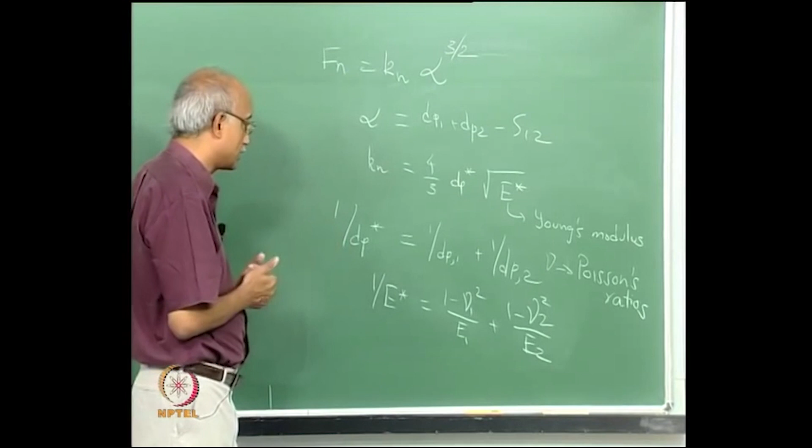But in terms of the tangential or shearing force, essentially what this equation tells you is, if there is relative motion between the particles, there is a tendency for them to jerk back together.

Now this actually gives us a clue as to why nanoparticles have greater agglomeration tendencies, because Brownian diffusion, which is the primary mechanism of transport for nanoparticles, has an inverse dependence on particle size. So as particles get smaller, Brownian diffusion values get larger.

So if you have two adjacent particles, the distance by which they are separated as a function of time will be greater when particles are smaller, because they tend to move over larger distances. And since it's a random walk, they are not going to move in the same direction. So as particle sizes get smaller, this distance of separation delta s as a function of time will get larger.

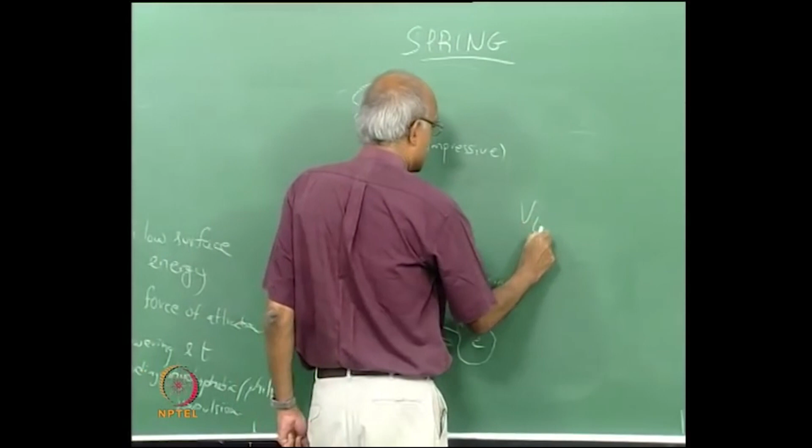Basically this relative velocity Vt will scale as 1 over dp. As the particle size becomes smaller and smaller, the relative velocity between adjacent particles will become larger, and therefore the Ft value will quickly increase.

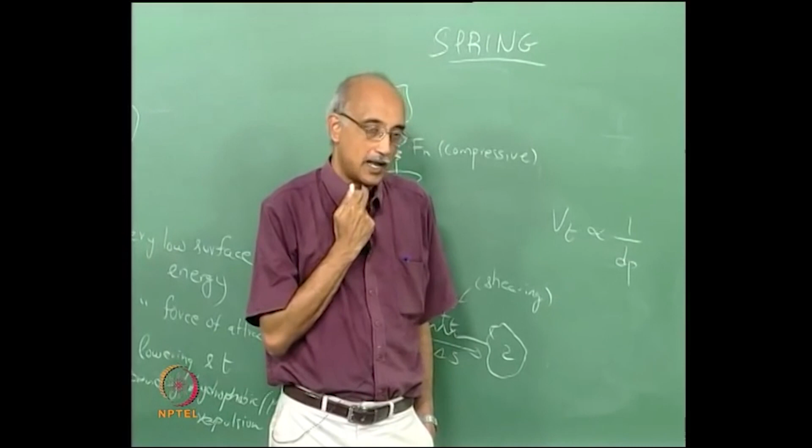And so the primary reason that particles in suspension have a greater tendency to attract each other as the particle size gets smaller is this tangential or shearing interaction. Now there are other reasons as well, and we will discuss them when we talk about the transport characteristics of particles, but the key thing to understand right now is that finer particles always have a greater tendency towards cohesion.

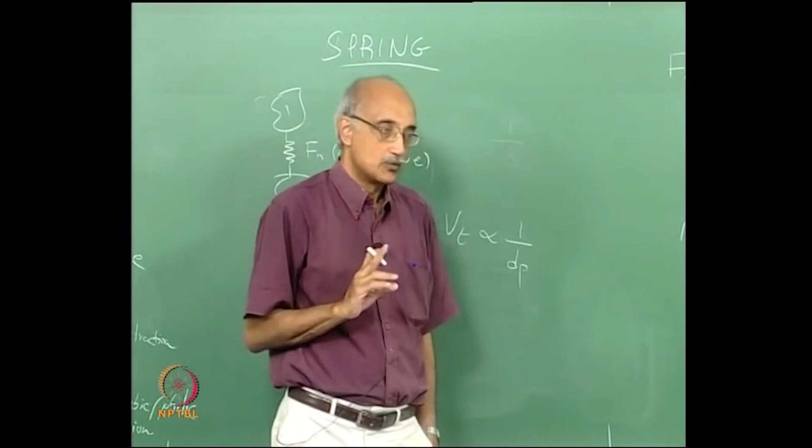Now that has a lot of implications for the flowability of suspensions or slurries. It's always more difficult to handle flows that involve fine particles compared to coarse particles.

So we'll stop this lecture at this stage. In the next class we'll talk about flowability characteristics of suspensions, what are the properties and characteristics of particles that affect flowability of suspensions, and how they can be optimized for various applications.